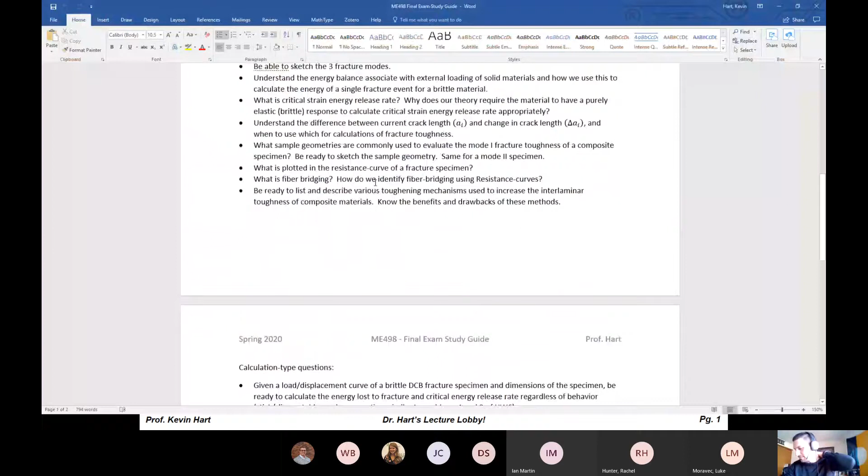So the first thing we did after the last test was talk about cure kinetics and rheological models. So let's get on with that. Know the definition of cure kinetics. All right, so kinetics is a pretty well understood branch of chemistry. It's a study of rate of reaction. If you want to throw cure in there, then maybe we come up with a little more formal definition.

Something like... I don't know, I'll just come up with it off the top of my head: the study of rates of reaction for thermosetting materials. That seems like a pretty good definition. You have to include somehow that the chemical reaction is including a cure step, right? That's what we mean by cure kinetics, the study of the rate of reaction of something that is going through a cure.

All right, so pretty straightforward. Just understand and know what people mean if you walk by someone and they're talking about cure kinetics or say that word, you understand. All right.

Now, for epoxy chemistries, what do the cure kinetics depend on? Which effects are most important? Well, they depend on many things. Obviously time, temperature, pressure — the things that we kind of control in the manufacturing process. Those are the three big ones: time, temperature, and pressure. It also might depend on if there are other chemical species present.

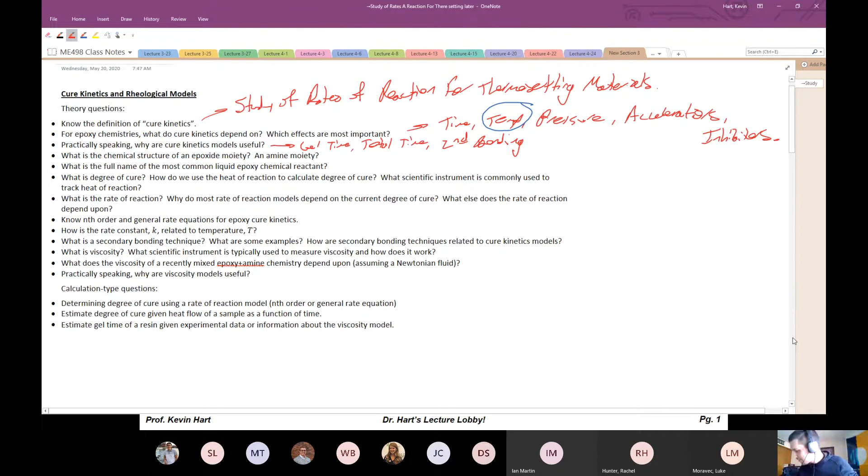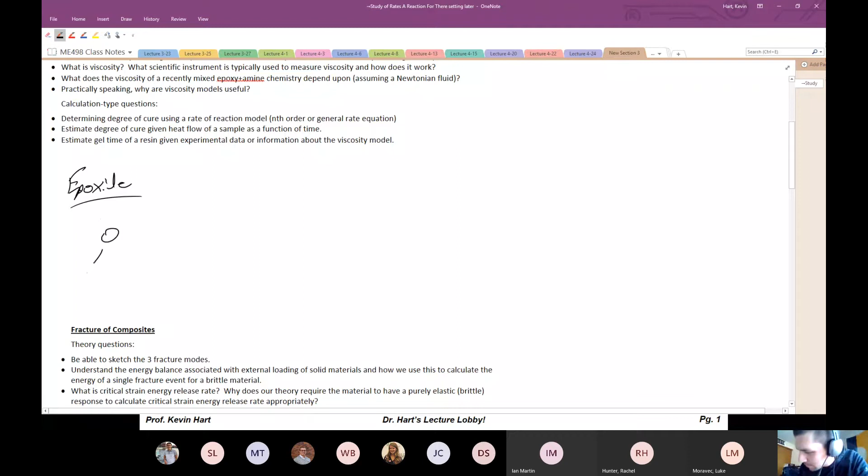What is the chemical structure of an epoxide moiety and an amine moiety? Remember, a moiety is a chemical species which is going to participate in the reaction. So epoxide moiety, that's OCC, or sometimes just drawn as that.

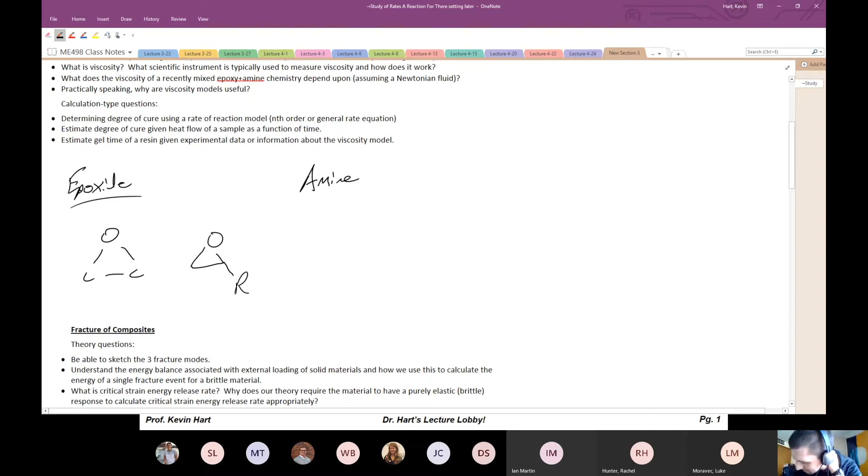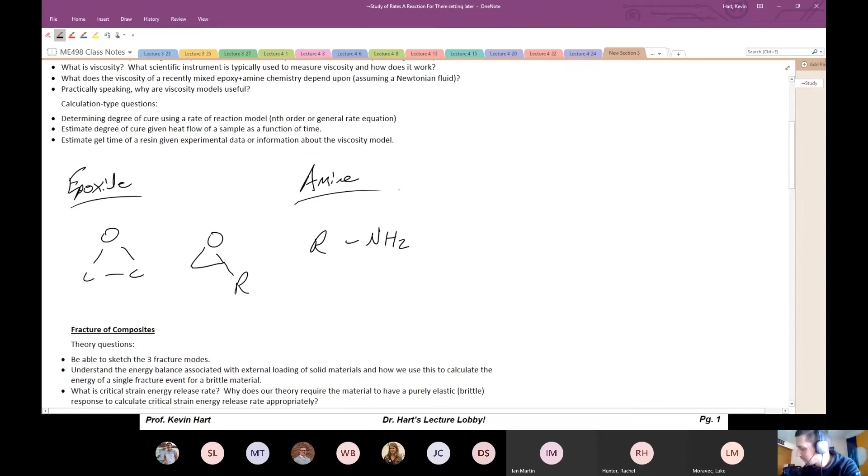So that's the epoxide moiety, and then the amine, usually connected to some random R group. Your amine moiety is the NH2, connected to some other portion of the molecule. This is reacting with this, and the way that this works is one of the hydrogens from the amine will pop off and spring open the epoxide ring, and there you go. That's how that kind of works. So there's your epoxide and your amine moieties.

What is the full name of the chemical epoxy chemical reactant? That's DGEBA, right? So DGEBA for short. D-G-E-B-A is the most common, and this is diglycidyl ether of bisphenol A. Not to be confused with diglycidyl ether of bisphenol F, which is also a very common chemical reactant. Know your DGEBAs.

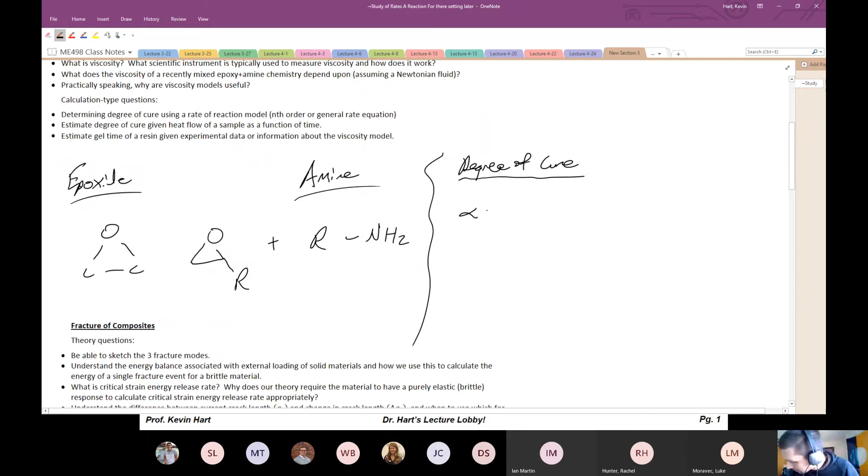What is degree of cure? How do we use heat of reaction to calculate degree of cure, and what scientific instrument is commonly used to track heat of reaction? So degree of cure is probably best to explain mathematically. We typically denote degree of cure with the variable alpha, and it's a ratio of how much heat has been released by my reaction divided by the total heat the reaction could release.

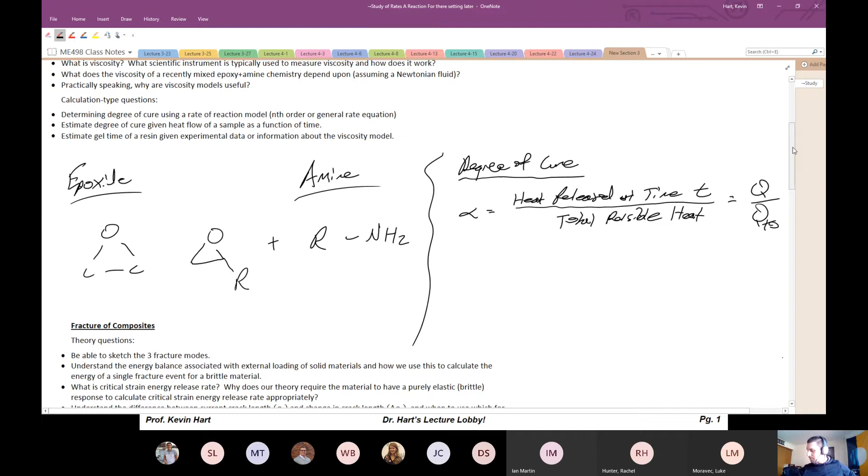Sometimes this is written as Q over Q total. So there's your degree of cure. It ranges from value 0 to 1. 0 meaning I have not reacted at all, and 1 is I'm completely fully reacted, all of the heat has been released from this particular reaction. So that is degree of cure.

How do we use heat of reaction to calculate degree of cure? Well, that's the heat of reaction divided by the total heat of reaction to calculate degree of cure. And what scientific instrument is commonly used to track heat of reaction? Well, that's a calorimeter. The most common in industry for evaluating this is called the differential scanning calorimeter, or DSC for short. But generally, if you want to track the heat of a reaction, you're looking for a calorimeter - that's the general name.

What is the rate of reaction? This is different. So let's talk about rate of reaction. Rate of reaction is d alpha dt. This is rate of reaction. It's how fast or slowly the degree of cure is changing. So it's the derivative with respect to time of the degree of cure evolving over time.

Why do most rate reaction models depend on the degree of cure? Usually d alpha dt is some function of alpha. So why does the rate of the reaction depend on the current degree of cure of the reaction? Well, we talked about this - as epoxies cure, there are less and less moieties available for reaction.

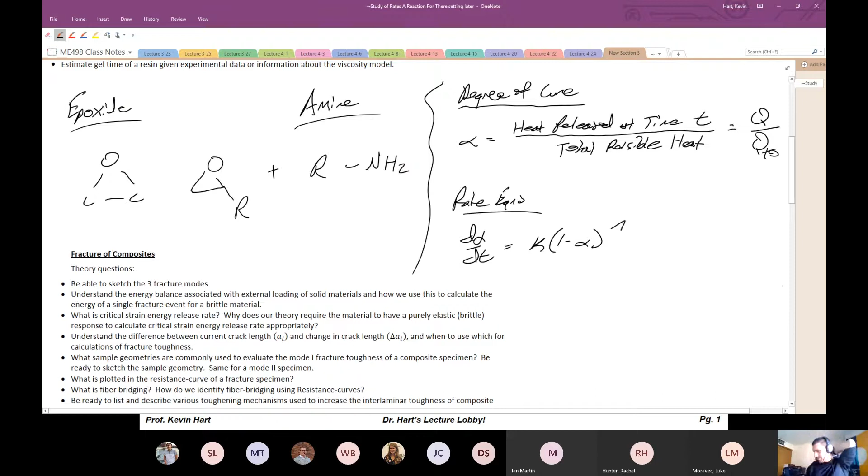No, nth order and general rate equation for epoxy cure kinetics. Remember our rate equations: we had something like d alpha dt equals k1 times (1 minus alpha) to the n. That's your nth order rate equation. The general rate equation is a little more complicated than that. I don't know if I'll have the space to put it in here. This is k1 times alpha minus 1... I can't quite remember it off the top of my head, it's in the notes. I want to make sure I don't mess it up.

I'm old, okay? Leave me alone.

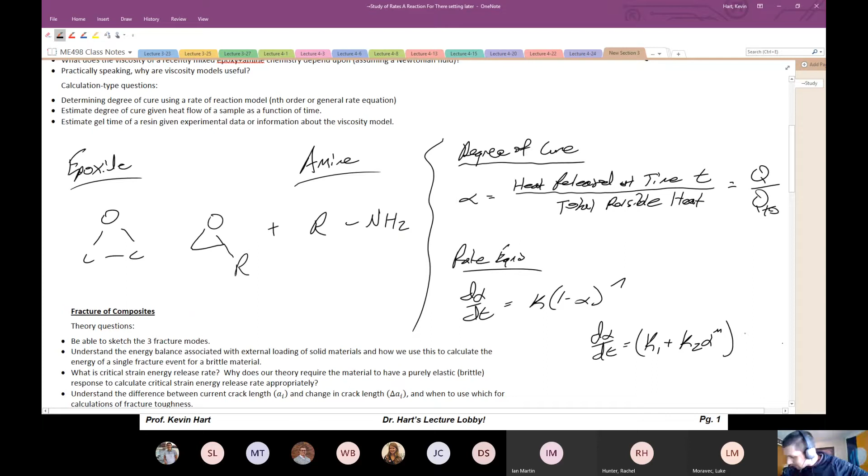K1 plus K2 alpha to the M, multiplied by 1 minus alpha to the N. There's your general nth order rate equation. This is nth order, this is general.

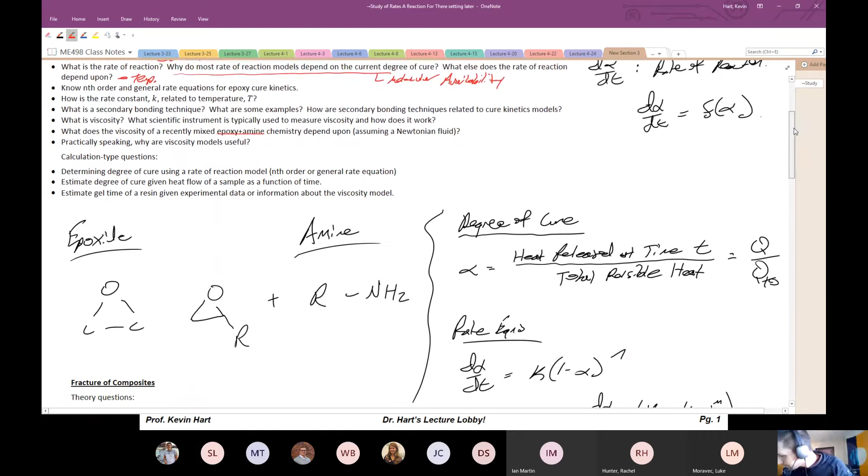What is a secondary bonding technique? What are some examples, and how are secondary bonding techniques related to cure kinetics models? Secondary bonding techniques we talked about include co-curing, generally secondary bonding, co-curing. What are the other technical terms? Co-bonding, bonding, co-bonding, etc.

The idea here is that if you have laminate number 1, which is cured at alpha equals 0.9, and you have another laminate that you're going to bond to it, also at alpha equals 0.9, and you bond these two, then you get increased reaction at this bonding site. That's because there's a chemical reaction that occurs across that interface rather than just an adhesive reaction. So there are cohesive reactions as well, meaning that the molecular structures of the two different species are interacting with each other.

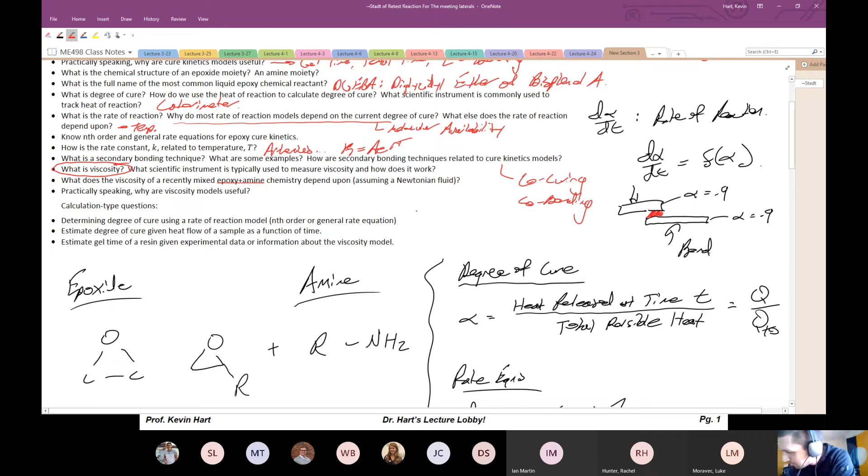Let's continue. What is viscosity? Technically speaking, viscosity is the ratio of the shear stress to the shear strain rate. I'm running out of space here, I need more space. So technically speaking, viscosity is the shear stress that you put on the piece, tau, divided by the strain rate, gamma dot. This is your viscosity generally. Physically, it's how much the material flows given an applied shear stress.

What scientific instrument is typically used to measure viscosity, and how does it work? That's a rheometer. We talked about rheometers a little bit here, let me bring the picture in really quick. Basically, you put a spindle inside of the liquid, and the spindles come in a variety of different types, many different types. The amount of torque it takes to spin the spindle inside that liquid, the amount of force, the kind of moment required to spin that spindle, gives you an indication of how viscous the material is.

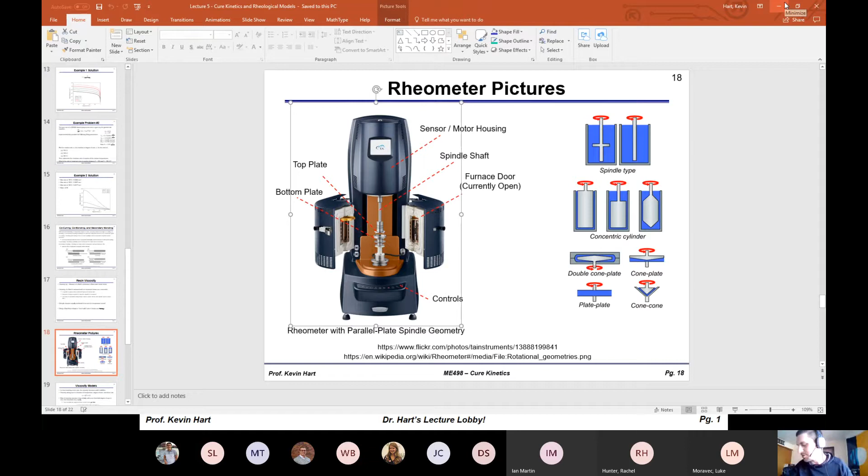The more viscous it is, the harder it is to spin that thing at a certain strain rate. So you measure the torque, and you know how fast you're spinning, so you have shear stress and shear strain rate, and the ratio is the viscosity. That's how a rheometer works, and this is one in action. You see the doors here that are open, they close shut, and inside there's an oven chamber that the spindle goes into, if you want to change the temperature inside and see how the viscosity changes, those sorts of things.

Next, what does the viscosity of a recently mixed chemistry depend upon, assuming a Newtonian fluid? Again, temperature is the biggest factor. Temperature, temperature, temperature. Sunday, Sunday, Sunday.

Practically speaking, why are viscosity models useful? A viscosity model is useful because, again, it can give you the gel time.

All right, so again, it's like this working time. It tells you when the viscosity is going to shoot up to infinity, and you're no longer able to process the material. That's probably the biggest one.

Also, it can sometimes be useful for sizing pumps. If you need to know how strong your pump needs to be to pump your liquid into your RTM process, you need to know the viscosity of the fluid, because the more viscous it is, the more back pressure you're going to get from trying to pump the fluid through some sort of pipe or something.

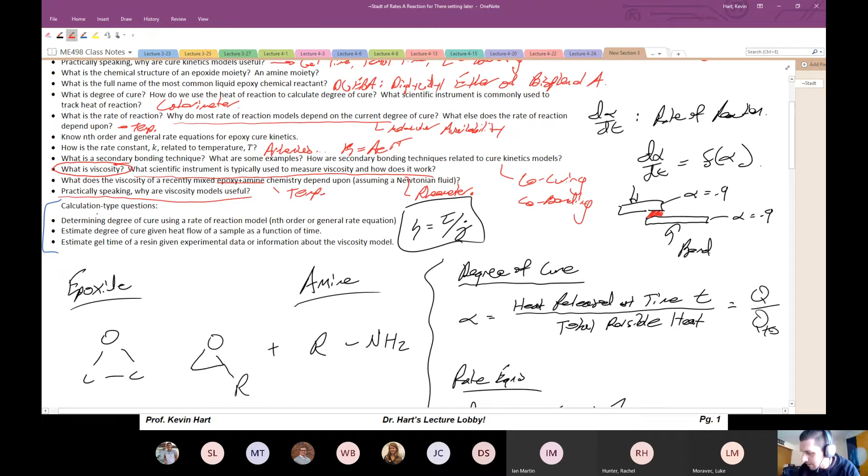All right, so that was a lot there. Now, calculation type questions I might ask you: determine degree of cure using a rate of reaction model. We did an example of this type of calculation in class, and you also had one on your homework, where you determine degree of cure using a rate of reaction model.

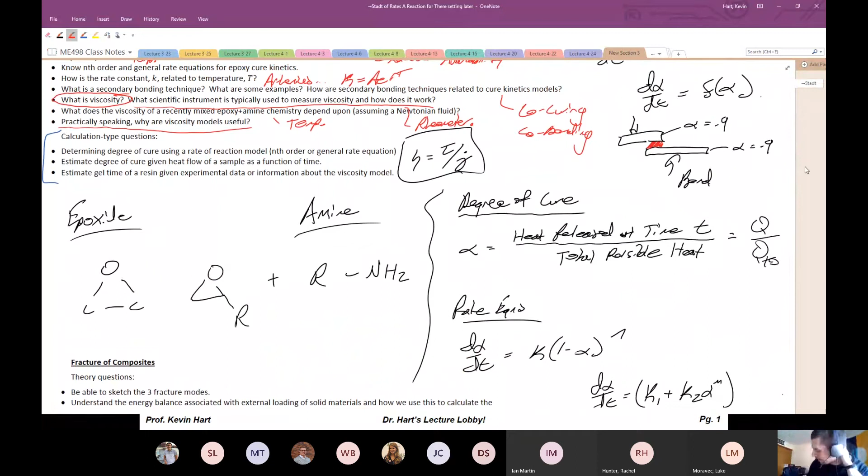So I might give you something like the nth order reaction model, which looks something like this, and ask you to integrate that and solve for time and determine what is the degree of cure as a function of time. That's something I asked you to do on your homework, so that's not an unreasonable thing to do in a short amount of time.

All right, estimate the degree of cure given heat flow of a sample as a function of time. This one's a little bit more subtle. Remember what heat flow as a function of time looks like: here's time, here's heat flow, usually given as W(T) in watts, usually watts or watts per gram, and this comes from a calorimeter.

And what this looks like is you're heating up, heating up, heating up, and then over time the heat of reaction kind of tapers off, something like that. And so this is the total heat of reaction.

Total heat. And if I'm interested in what is the current degree of cure of this piece at any time t, well, at this particular time, let's call it T1, I would move my way up here and say that this is the heat associated with time T1. So this is Q at T1. And then my degree of cure, alpha, would be whatever Q is at time 1 divided by the total heat.

So if I gave you a graph that looked like this, you'd have to figure out: what is the area under the curve for the total situation? What is the area at some specific point, so on and so forth? So you should be able to calculate degree of cure given some sort of general chart that looks like this.

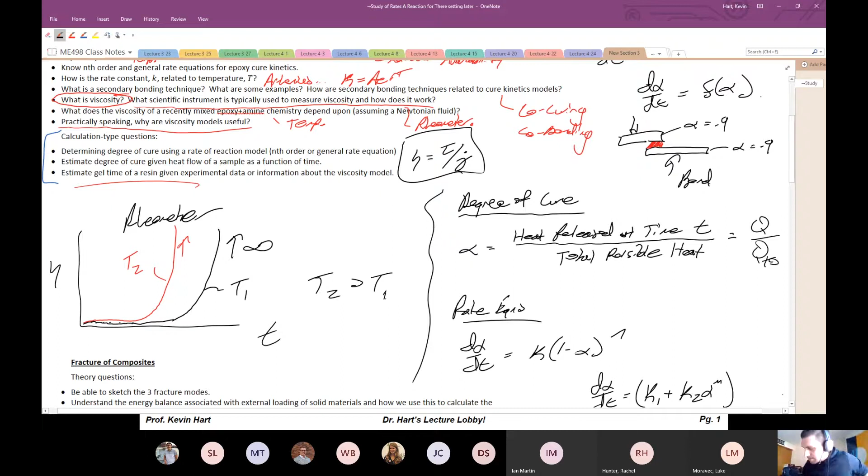And beyond, right? And you might have another data set that's at a different temperature that shoots up to infinity here. This might be T2, and this might be T1, and obviously T2 greater than T1, because we know that viscosity depends on temperature, and it's going to shoot up to infinity very, very quickly at higher temperatures of cure.

So there you go with some rheometer type data. So if I give you that sort of thing, you might want to estimate the gel time as, I don't know, the time that it approximately goes to infinity. So here's T gel for temperature number 1. Where does it shoot up to infinity? Give me some approximation. All right, so that's that.

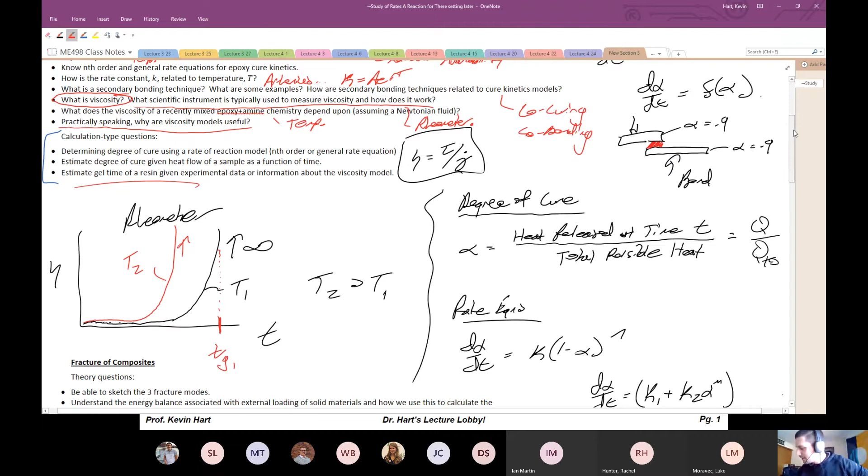Next, we went on to fracture. Fracture was, in this portion of the course, probably the most mathematically intense part that we had, though I think fracture is important for composites because it's one of the dominating modes of failure. So it's important for you guys to know fracture - that's why I spent 4 or 5 lectures on it.

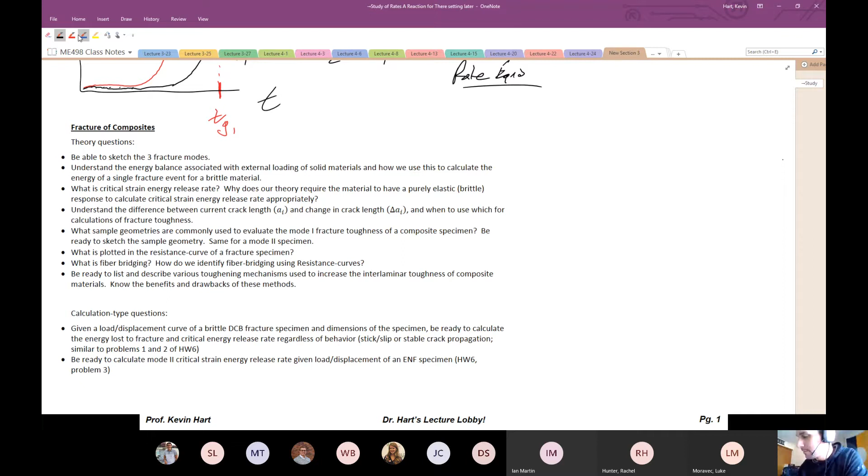All right, able to sketch the 3 fracture modes. Yes, all right, let's do that. Mode 1: here we got our awesome sample, here's the crack. Mode 1, here.

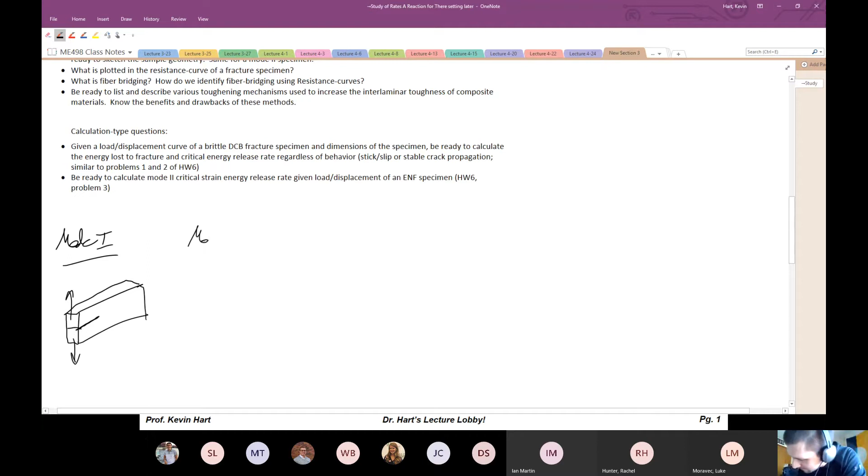Mode 2: here we got our crack again, would be loading in this general direction. And then mode 3.

I expect this level of terrible sketching on your test, okay? Mode 3 is we're loading across the plane, this way, this way.

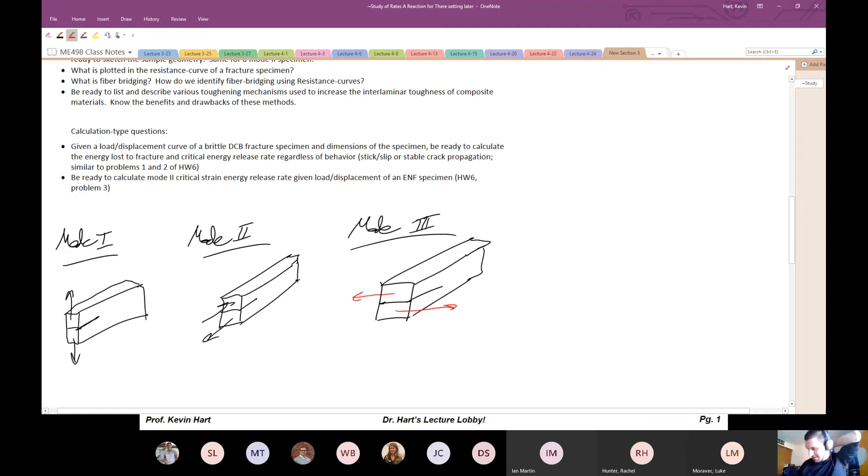All right, the trouser tear. Not the trouser terror, the trouser tear. All right, those are the 3 modes.

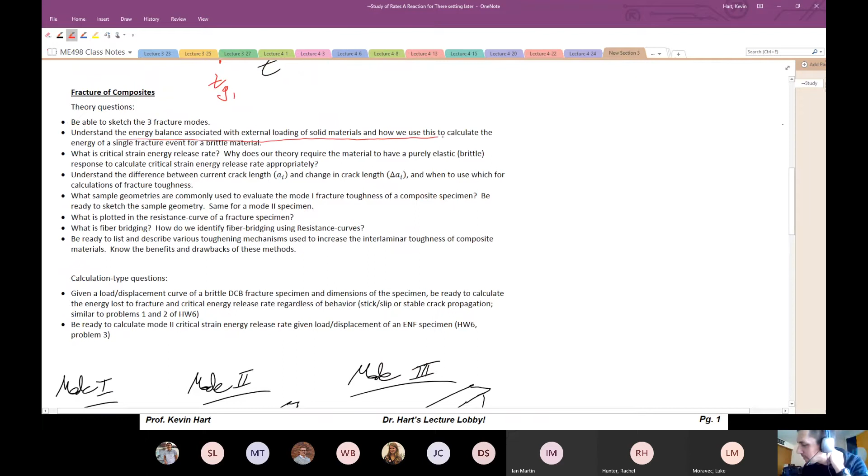Understand the energy balance associated with external loading of solid materials and how we use this to calculate the energy of a single fracture.

So we know generally when we load a solid material, let's say you have some bar. Guy walks into a bar.

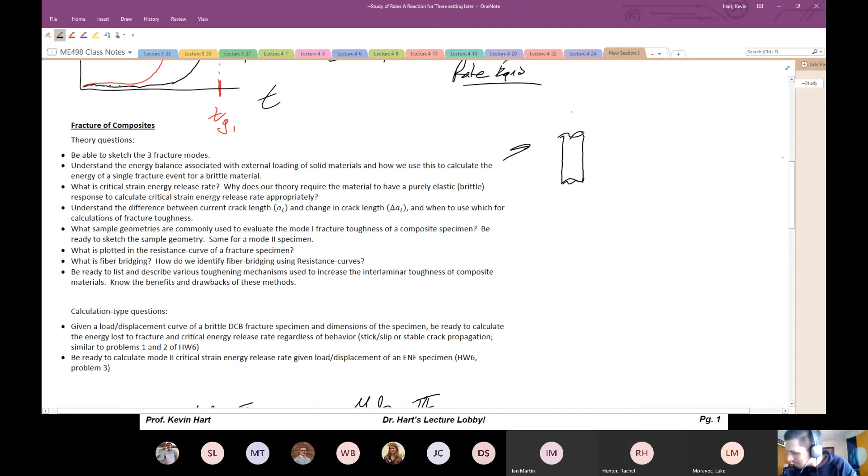So let's say we have some bar and we're loading this up, just in uniaxial tension. There is a work associated with us providing this external force. The work of external forces is going to be something like the integral of this load over the displacement. So there's some total work that gets applied to this piece.

The total work that we apply externally has to be balanced by the energy that's inside of the piece. It could be balanced by elastic strain energy, could be balanced by plastic strain, could be balanced by motion, so kinetic energy, and it could be balanced by fracture.

I'll also say other. Other might include things like heat, sound, those sorts of things. If I load very quickly, it's going to make a noise. That noise is release of energy.

Now, what we talked about in our class is we generally said that materials were brittle. So we're kind of neglecting this guy here, saying that we're brittle, so we don't have any plasticity in our samples. That's an assumption that we made. If you make a thermoplastic composite, that's not a good assumption.

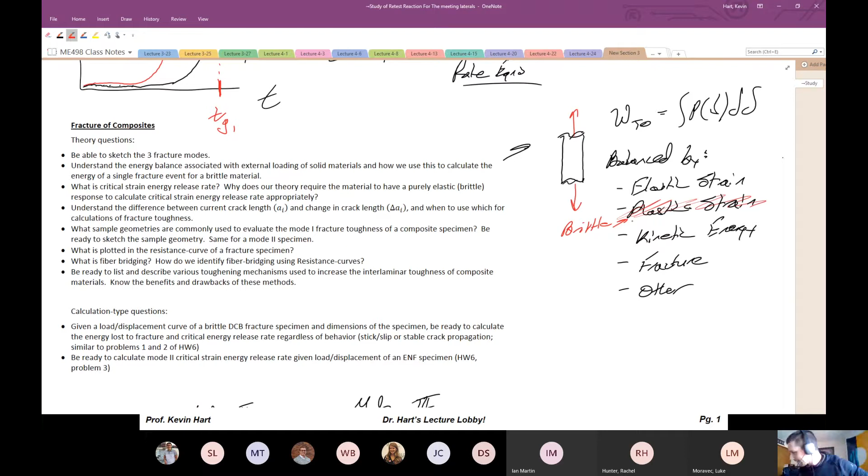We're also assuming it doesn't move, so no motion. Other, we're neglecting. So really, the total work that we put into the system was going to be balanced by elastic strain and by fracture.

So mathematically, we wrote that the total work that goes into a piece is the elastic strain energy UE plus the energy associated with fracture, which we labeled as capital D. This was the general model and where we built everything for composites in our particular class. This was the basis for all of the modeling that we did for our system.

So kind of just understand this generally, and why we have to assume something like a brittle material so that we can neglect plastic strain, and why we have to assume that we're loading it slowly so that there's no kinetic energy, etc.

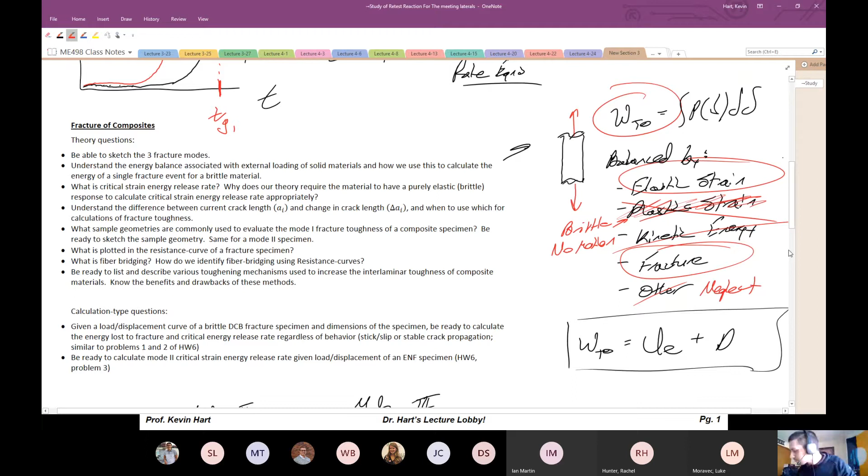How we use this to calculate the energy of a single fracture event for a brittle material. This again goes back to what it looks like when we load one of these things up. So here's my displacement delta, here's my load P, and let's say that I have a sample that looks something like this, and I'm pulling on it here, and it's got a fracture there.

So what's going to happen if I put this in a load frame? It's going to load up, and then all of a sudden, at some point, there's going to be some fracture event, bang, that occurs. And that fracture is going to release the energy, and then we can unload back to the beginning. So this is load, and this is unload. And here, this is the fracture.

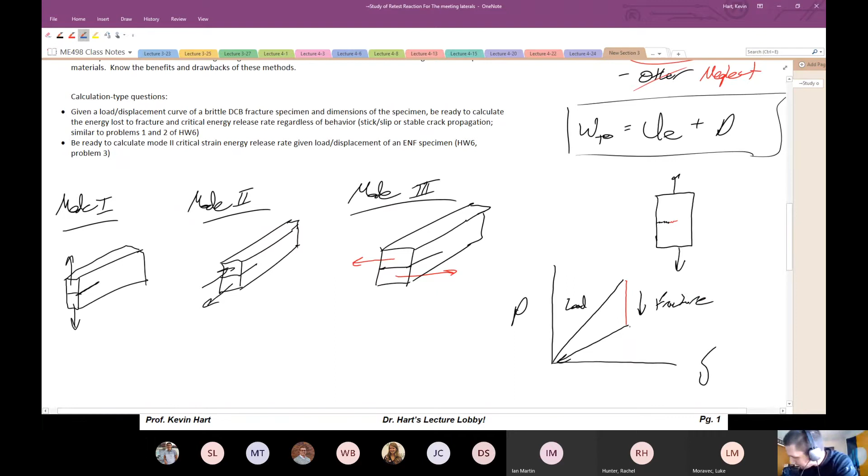So the energy that we recover is the energy inside of this triangle here. This is recovered energy, which is the energy under the curve here. So this is elastic energy, UE. And then the energy that went into the fracture is the remaining energy that exists inside of this load displacement curve. So here, this is the energy of fracture, capital D.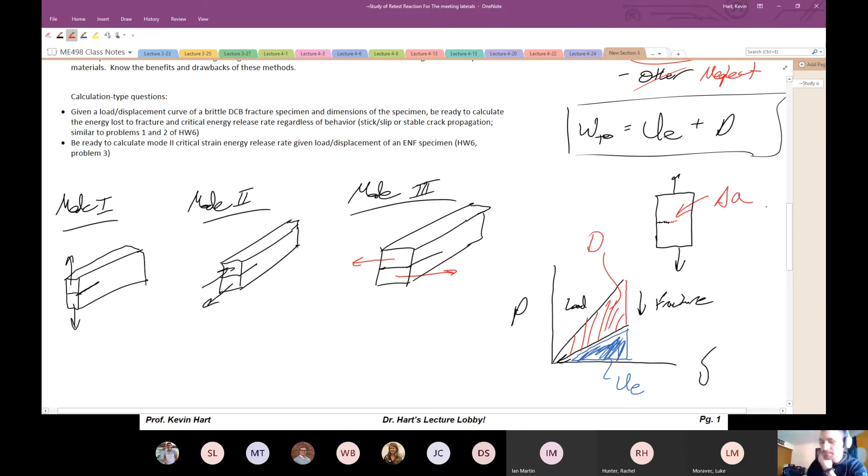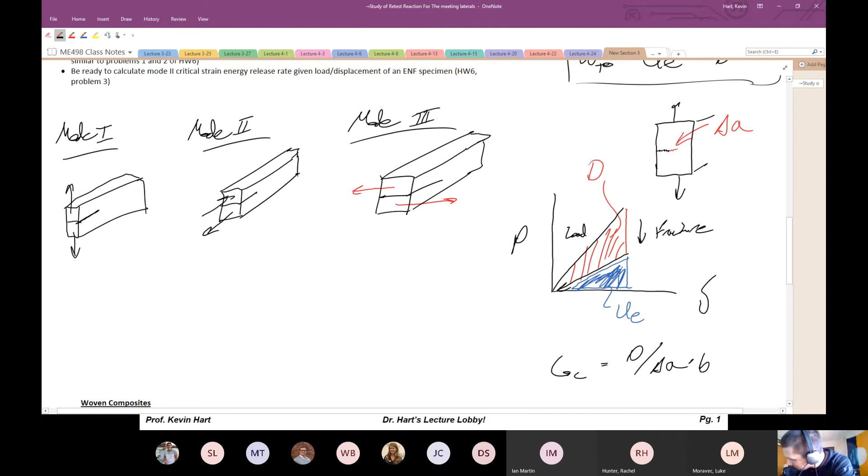So if the crack advance, this delta A, has the energy associated with it, which is this capital D, then we say that the critical strain energy release rate, GC, is just equal to fracture energy D divided by the crack advance length delta A times the width of the piece into the page, B. We assume that this has some width to it, which is little b.

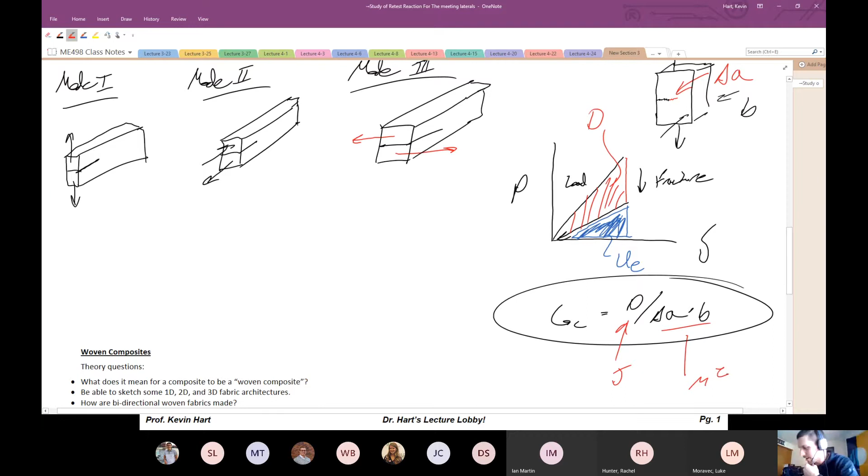So this is your critical strain energy release rate. It's in units of something like joules per meter squared. Energy required to open the crack a certain area, right? Energy per crack opening area, joules per meter squared. And that's your fracture of a brittle material.

So what is critical strain energy release rate? Well, I just talked about that. Why does our theory require the material to be purely elastic? Response to critical strain energy release rate appropriately. We talked about it being brittle because we know that it has to be just elastic strain and fracture that sort of balance this thing out. So we have to have brittle behavior so that we can eliminate plasticity. Brittle, no motion, eliminate plasticity, eliminate kinetic energy. So that's why our theory requires the material to have a purely elastic response.

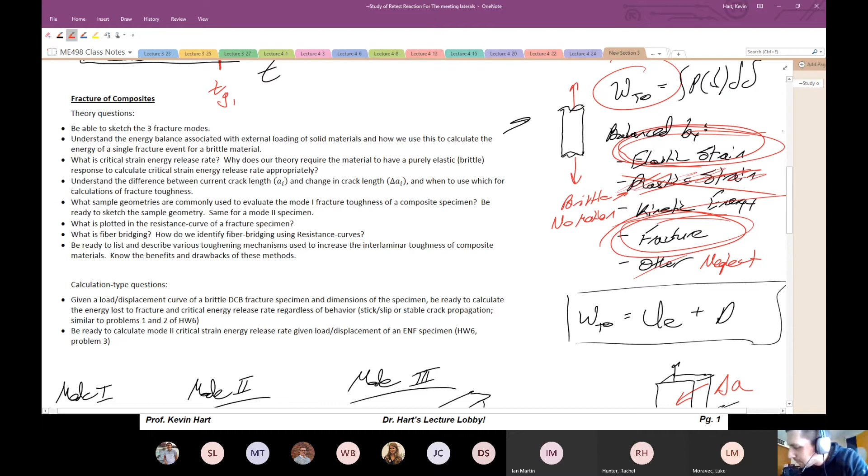Understand the difference between current crack length and change in crack length, and when to use which for calculation of fracture toughness.

This kind of threw you guys a little bit in the homework. A lot of people had this mistake differentiating between total crack length and crack advance.

Say you have some sort of fracture specimen. Let's call it a double cantilever beam specimen. Here's my initial crack length, and I'm loading this guy up here. This is a double cantilever beam composite specimen. It's got width into the page of B.

So I load this guy up, and I'll say that it has some initial crack length, which is a0, my initial crack length. When I load this thing up, let's say it behaves in a stick-slip fashion. So I load this guy, it fails a little bit, I load it more, it fails a little bit, I load it more, it fails a little bit. And then we unload.

So what that's going to look like is I'm going to have a failure event here that occurs, a failure event here that occurs, and a failure event here that occurs. So the crack is going to propagate in each one of these situations. Maybe that's the propagation associated with event number 1. There's some propagation associated with event number 2, and there's some propagation associated with event number 3.

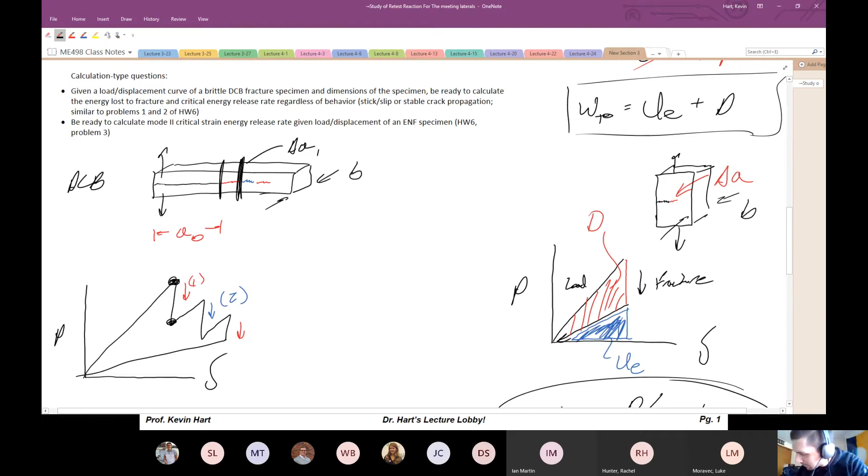That's different than the crack propagation associated with event 2. That might be from here to here. So this distance is delta A2, the distance that the crack propagated for event number 2, associated with that point and that point, the amount that the crack opened between those two particular points, and so forth.

That is different than the total crack length, which, at this particular location, the total crack length would be this guy here. This is A2, where this is sort of the second propagation event. So what is the crack length at this location?

Know the difference between total crack length and crack propagation between two different points. They're different values.

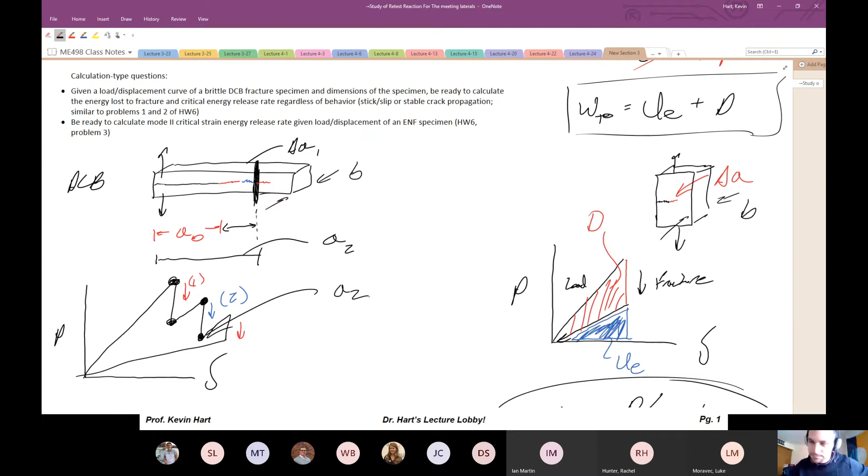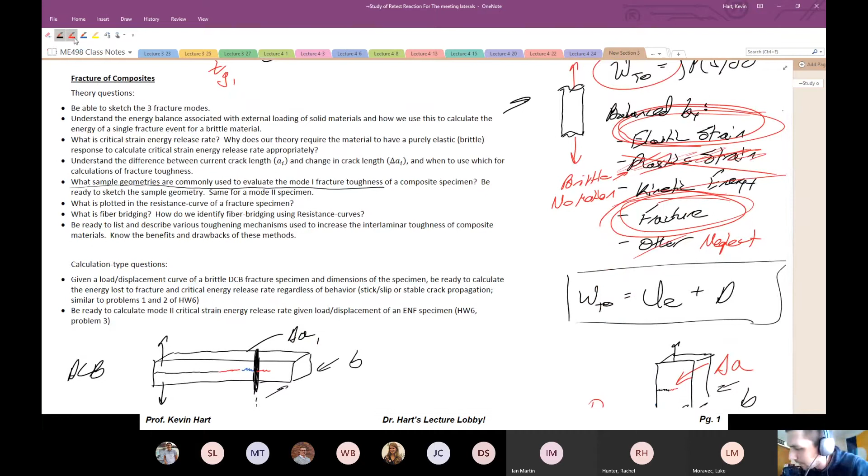What sample geometries are commonly used to evaluate mode 1 fracture toughness? Well, double cantilever beam for mode 1.

So if you're looking at it from the side, it looks like this. You have some starter crack, and you're going to load it here and here, maybe by putting piano hinges on there, or drilling some holes inside of the sample. So this is mode 1, the double cantilever beam, and then mode 2 is the end notch flexure.

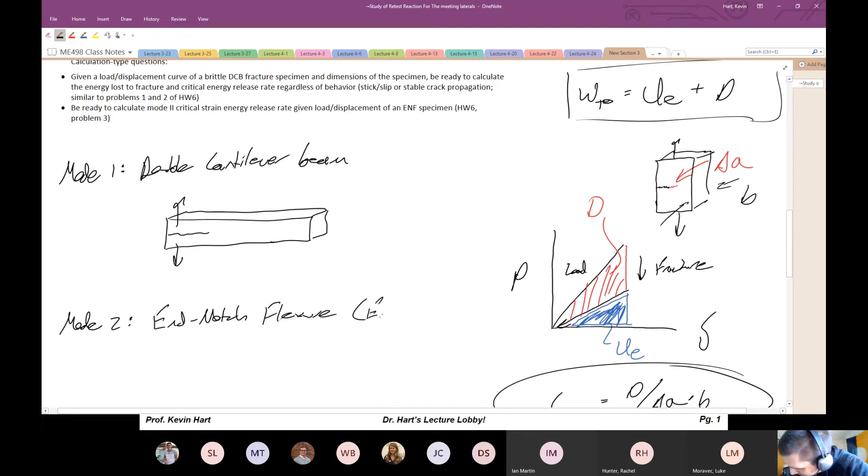Abbreviated as ENF. The end notch flexure looks very similar to a double cantilever beam, except in the way that it's loaded. Here again we have some pre-crack inside the sample, and now we're going to load this guy, typically in 3 or 4 point bend. So P on 2, P on 2, and P. That's going to cause this crack to propagate in that general fashion. So that's end notch flexure.

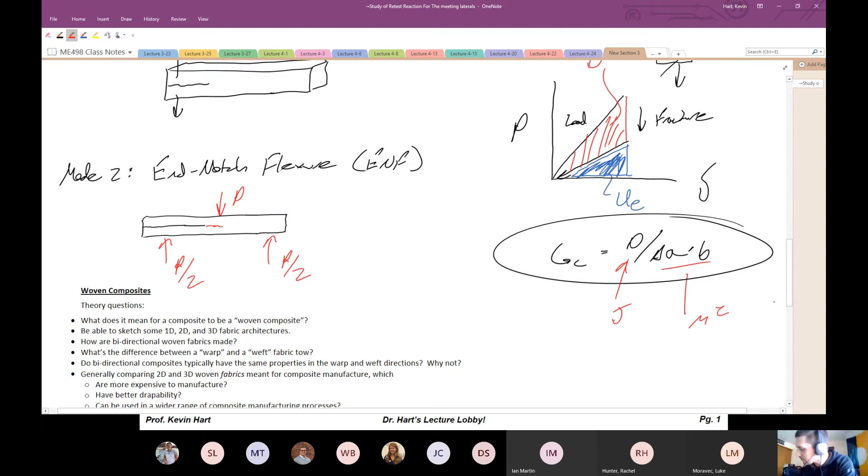What is plotted in the resistance curve of a fracture specimen? Well, the resistance curve of a fracture specimen plots GC versus crack length delta A.

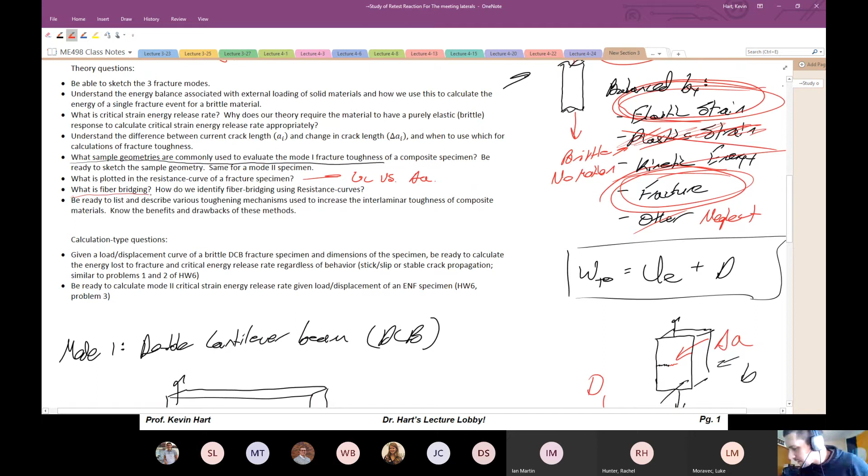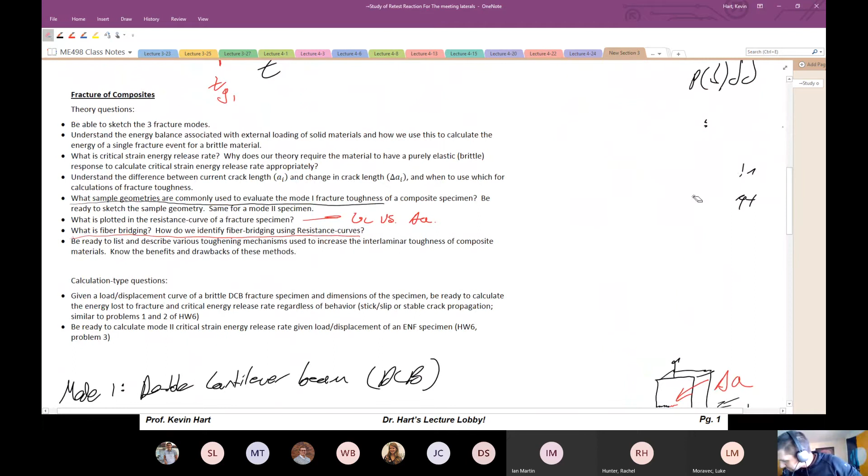What is fiber bridging, and how do I identify fiber bridging in resistance curves? Need some more space. Might be better just to show the picture of this guy. Picture's always better. It's tough for me to draw fiber bridging. Not so easy to draw.

All right, whatever. OneNote's being dumb? Well, it's probably user error, but you get the idea.

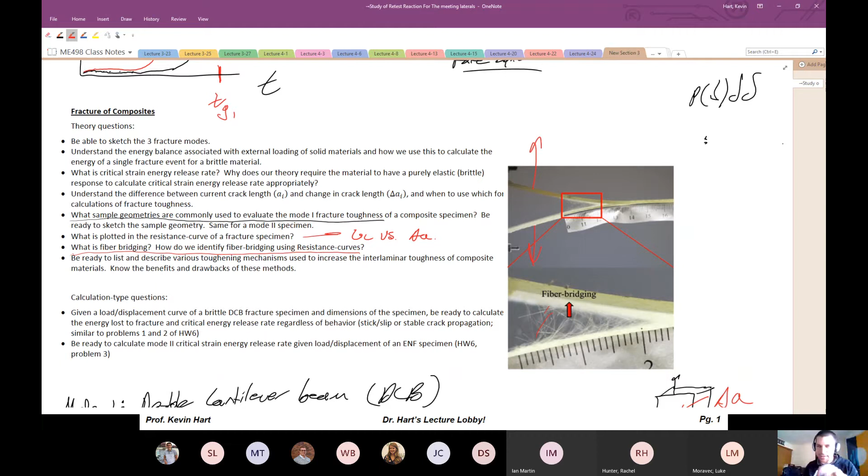All right, here's fiber bridging. You're pulling this guy open, pulling this guy open, and there's all these hairs occurring inside of the crack plane, and those hairs act to toughen the interface between the individual layers. Now, when you first start the testing, those hairs are not there because there's a piece of Kapton or Teflon inserted between the layers that stopped that fiber bridging originally.

So what happens when you're looking at the response of a test is if you're looking at the R curve for a DCB, it might look something like this. On the x-axis is your change in crack length, the crack length delta a, and this is your Gc value. Initially the values are low, but then at some point it plateaus off.

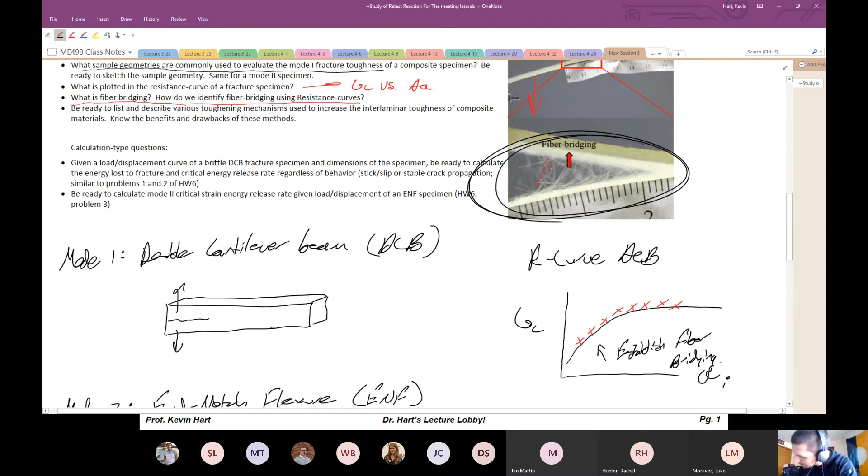So what's happening here is that we're establishing fiber bridging, something that looks like this. And then once I've reached this plateau here...

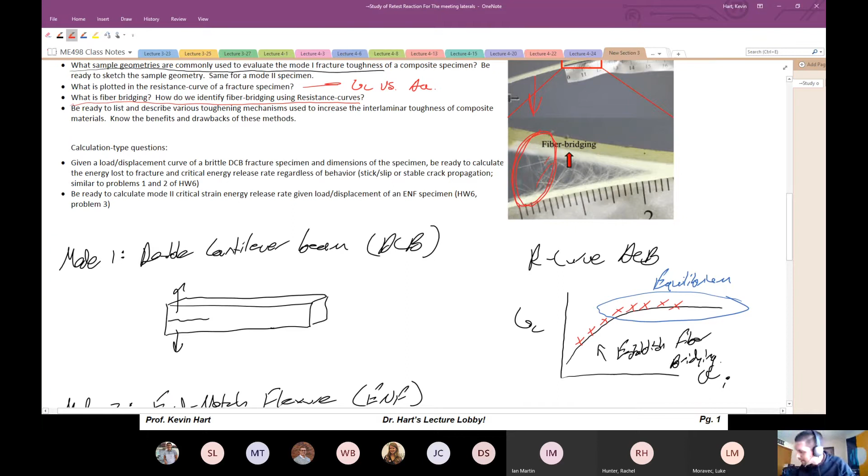I've got an equilibrium between the amount of fibers being created as the crack propagates and the amount that are being ruptured on the back end. There are guys on the left hand side being ruptured as the crack propagates, and we're forming new bridges on the front end. So once there is an equilibrium between how many we're losing on the left and how many are reforming on the right, we're not going to reach a plateau until that occurs. But once it does, you see this equilibrium in the R curve.

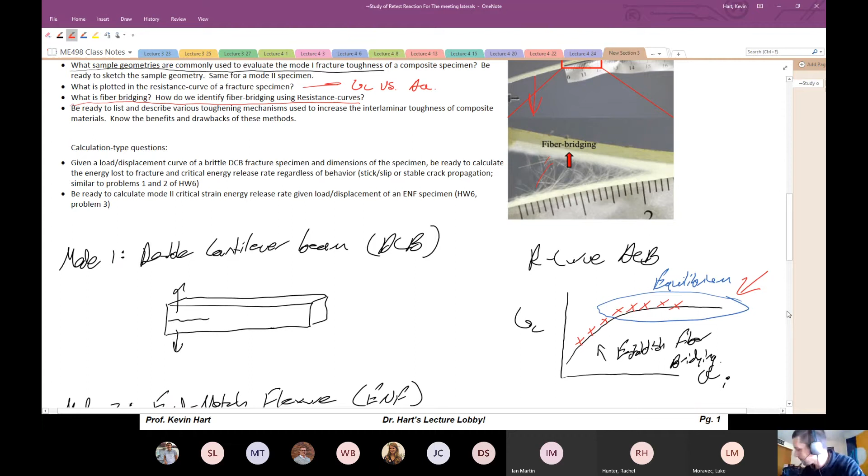That's how we identify fiber bridging, and that's what fiber bridging is — fibers across the interface which help toughen it.

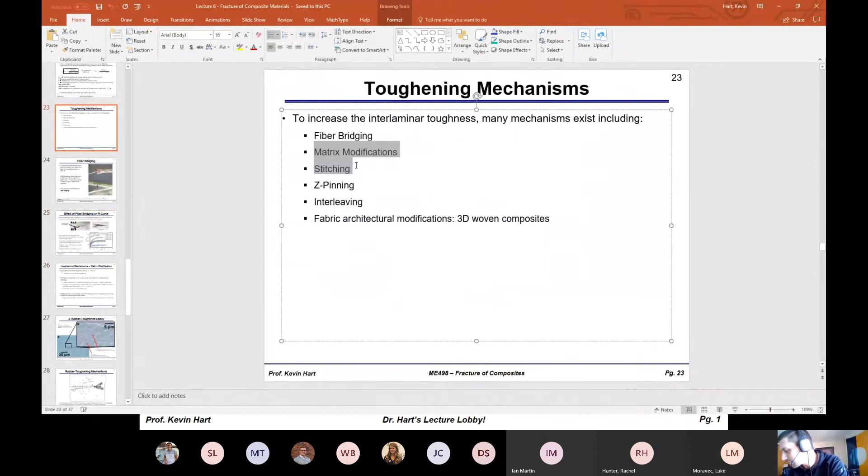Next, be ready to list and describe various toughening mechanisms used to increase interlaminar toughness. We talked a lot about these, and there's a lot of different types that we saw. The list is on slide 23 of your notes. Fiber bridging is one natural toughening mechanism, but we also talked about matrix modifications, stitching, Z-pinning, interleaving, and fabric architectural modifications.

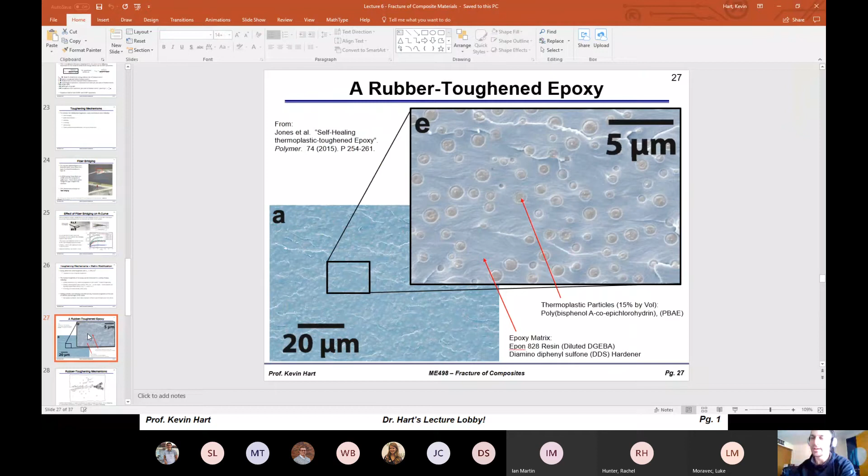All right, so here's a rubber toughened epoxy matrix. We talked about this picture a little bit. Rubber toughening can help increase the toughness of the matrix material through plasticity mechanisms that are good for rubber toughening.

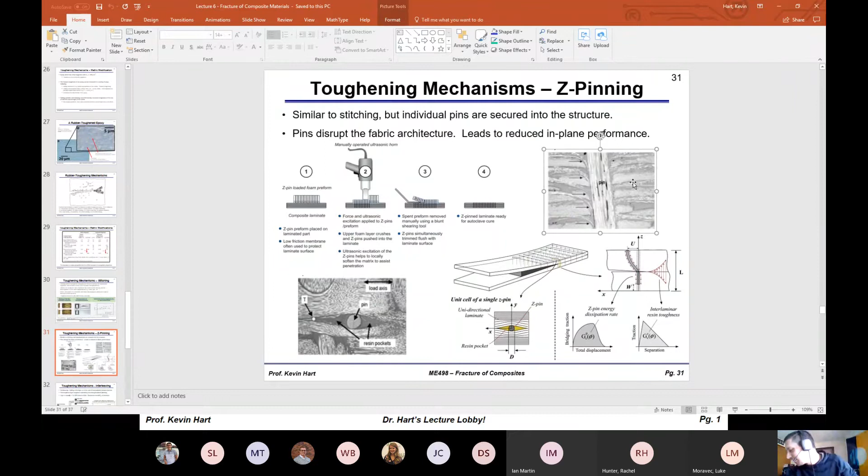We talked about stitching and Z-pinning. Here we had that gun that was driving the pins into the fabric. We see the pins forming inside of the fabric, but we know that these pins disrupt the fabric architecture that's in the plane, so it's not always the best method.

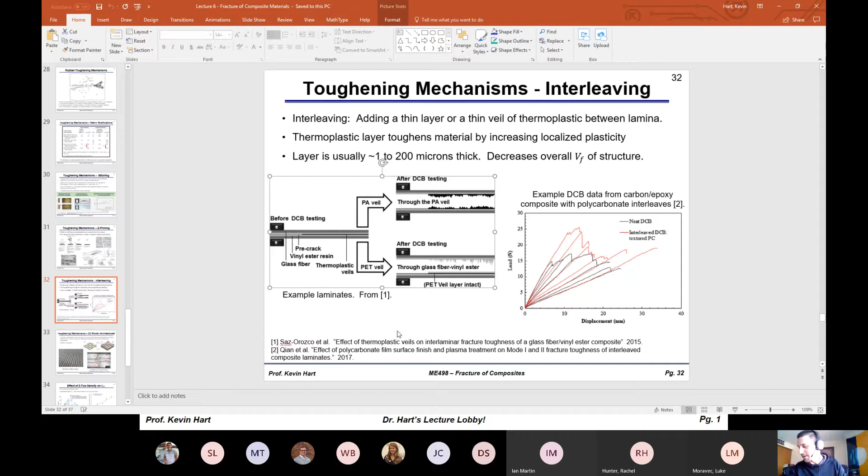Here we talked about interleaving. Interleaving is using a thermoplastic layer between fabric layers to increase toughness. If you add a very thin thermoplastic layer between the individual lamina layers, you can arrest crack growth through the plasticity involved in that thermoplastic interlayer. Here this is a PA veil — PA is polyamide, another name for nylon. Here is PET, polyethylene terephthalate, a different type of thermoplastic going between layers of a DCB, toughening the matrix.

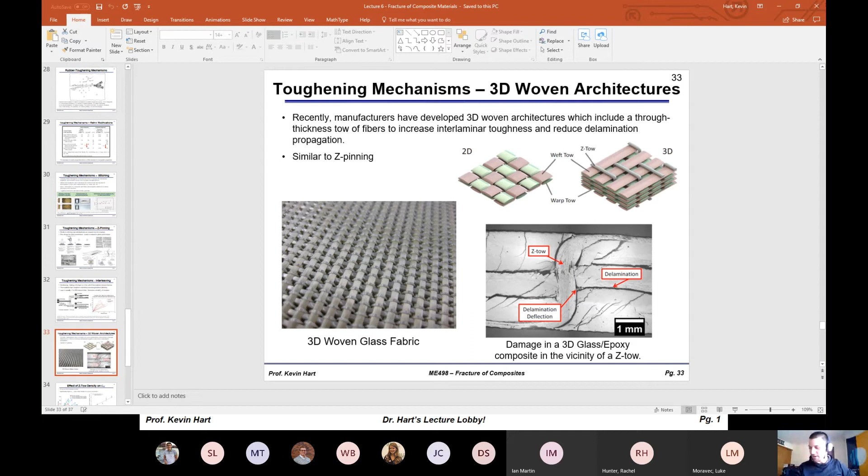We talked about 3D composites. The through-thickness tow really helps increase the interlaminar toughness of these 3D composites, with woven architectures giving this added benefit of increased fracture toughness. So those are some of the toughening mechanisms we saw in this class.

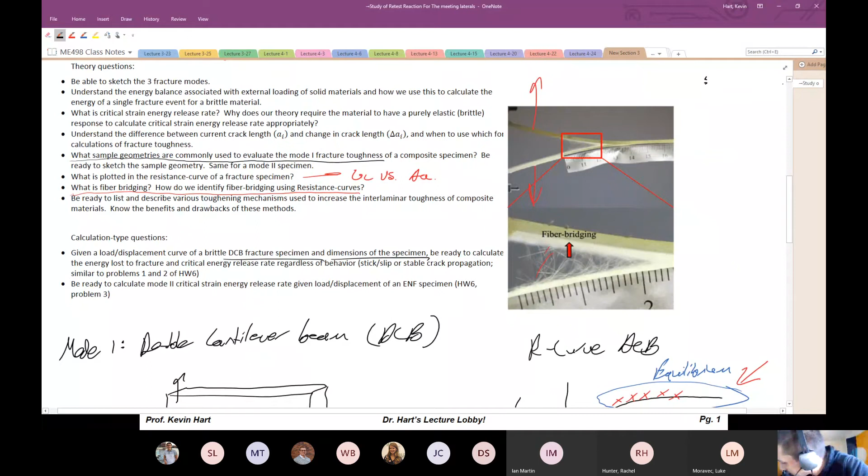Calculation type questions: given a load-displacement curve of a brittle DCB fracture specimen and dimensions of the specimen, be ready to calculate energy loss to fracture. I sketched that out before — the idea was if you have a load and displacement curve of some fracture specimen, let's call it a DCB specimen, with delta on one axis and load on the other, you load this up, there's a fracture event, and you unload.

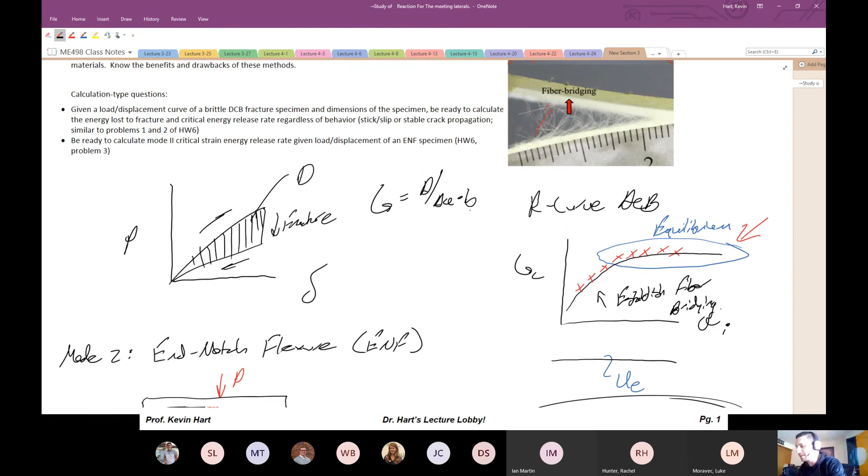You can be ready to calculate what is the area associated with a fracture. So here's D, and then if you have sample dimensions, G is just D divided by delta A, the crack advance, multiplied by the width of the sample B. That would be a sample calculation you might do on the test. It's areas under the curves, man — that's all it is in this class, I guess.

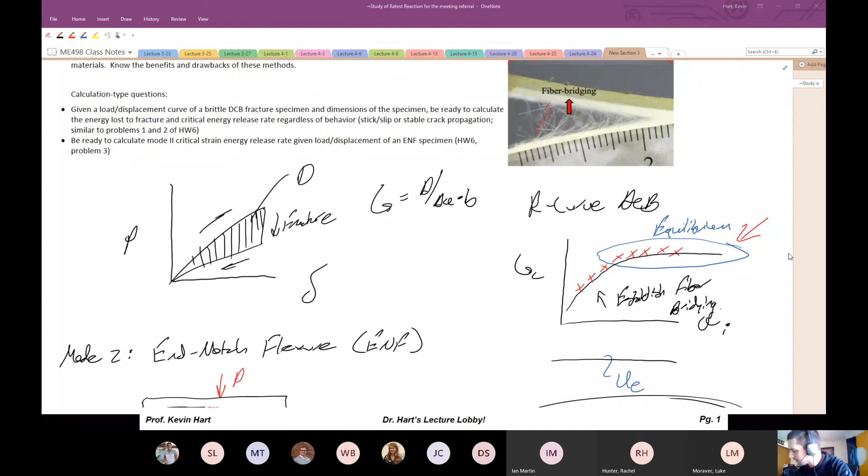Be ready to calculate mode 2 critical strain energy release rate given information about an ENF specimen. That's something you did in homework 6, problem 3. We had an end-notch flexure specimen, there was an equation associated with that, and you did that for problem number 3 in your homework. All right, so that's the fracture section.

Woven composites — we just got done working our way through this. You just did this on your homework, so I'll spend a little less time here. What does it mean for a composite to be a woven composite? Well, it has fabric that is interwoven.

With multi-directionality.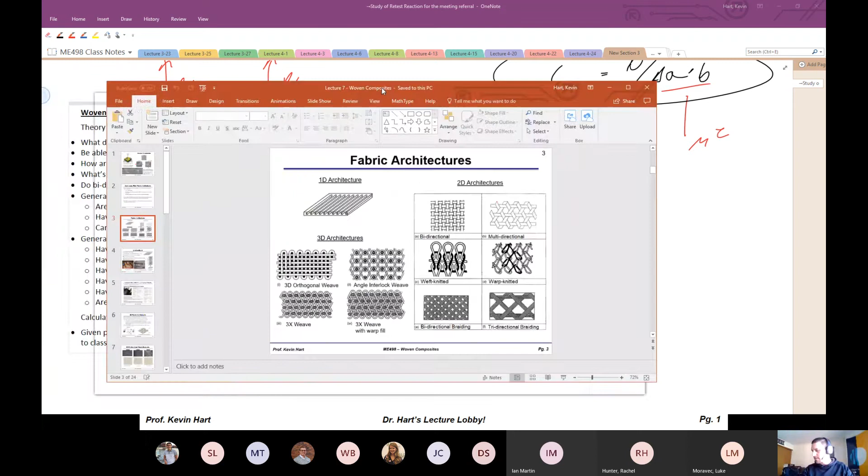Be able to sketch some 1D, 2D, 3D fabric architectures. We saw a lot of these different fabric architecture types. Hopefully you can sketch them at this point, but the general figure I had for the class looked something like this. 1D is obviously unidirectional. 2D architectures include bidirectional weaves, like plain weaves and satin weaves. You've got knitted fabrics on row number 2, and braided fabrics on row number 3. Then here are 3D architectures: orthogonal weave, angle interlock weave, etc. So those are some fabric architectures.

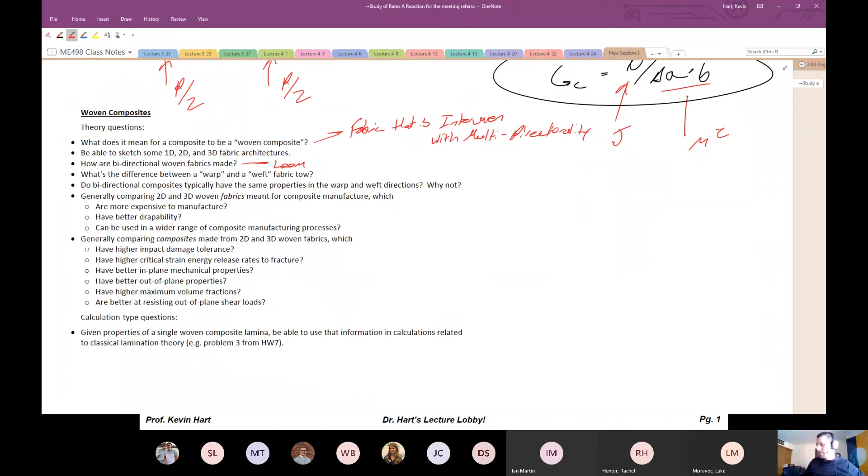How are bidirectional woven fabrics made? Well, they're made on a loom. Maybe just be able to sketch the process. You don't really need to know all the nomenclature, but basically you've got warp tows that are being separated, coming together on the back end to form the fabric. Then you're passing a weft tow in between the warp tows. Here, this gate is lifting up and down the warp tows as it goes through. This is called the shed, and the shed is arranging the patterns. I showed a video of this in class.

What's the difference between a warp and a weft fabric tow? Well, the warp tows are the tows aligned longitudinally, these continuous tows on the loom. The weft tows are being shot in between the openings inside of the loom as it goes through. So that's the difference between warp and weft.

Do bidirectional composites typically have the same properties in the warp and weft direction? Why not? Okay, they typically do not. When you did your homework, hopefully you found it was more difficult to find fabrics with the same properties in both warp and weft. That's because of how these are manufactured - it's really difficult to keep the warp and weft counts consistent. What I mean is you have a certain number of ends and a certain number of picks, which are the warp and weft counts per inch of the fabric. It's really difficult to keep those consistent from a manufacturing perspective. So it's difficult to have fabrics with the same properties in both the warp and weft directions. Why not? Manufacturing difficulty - it's difficult to keep that consistent.

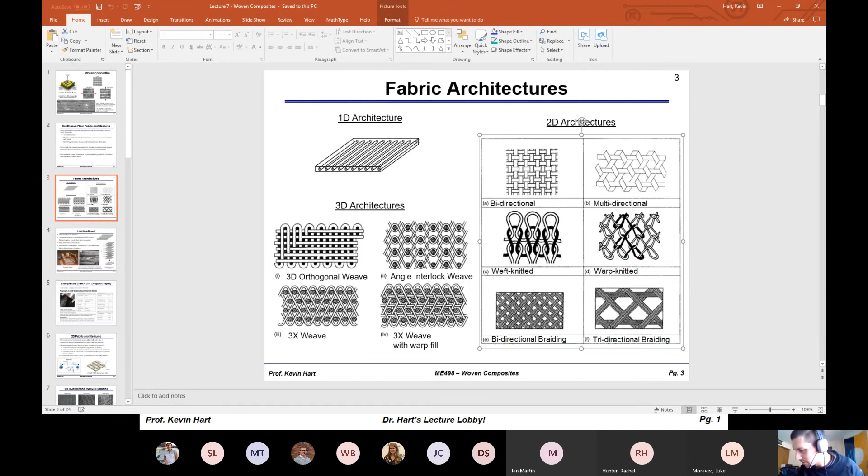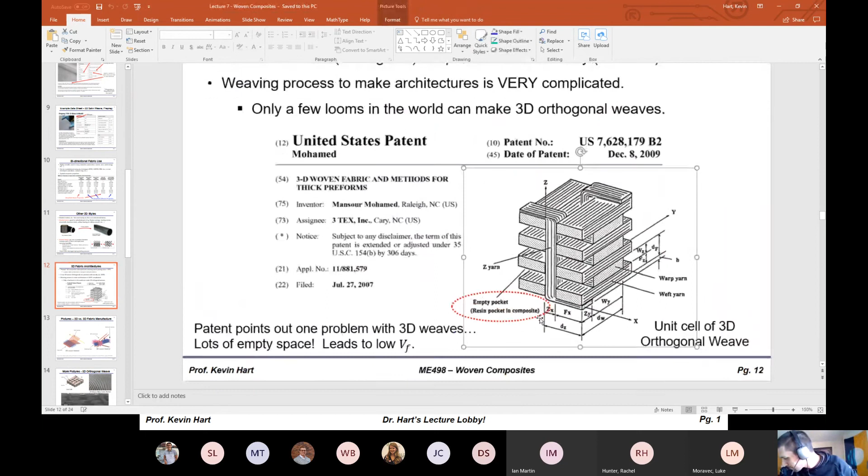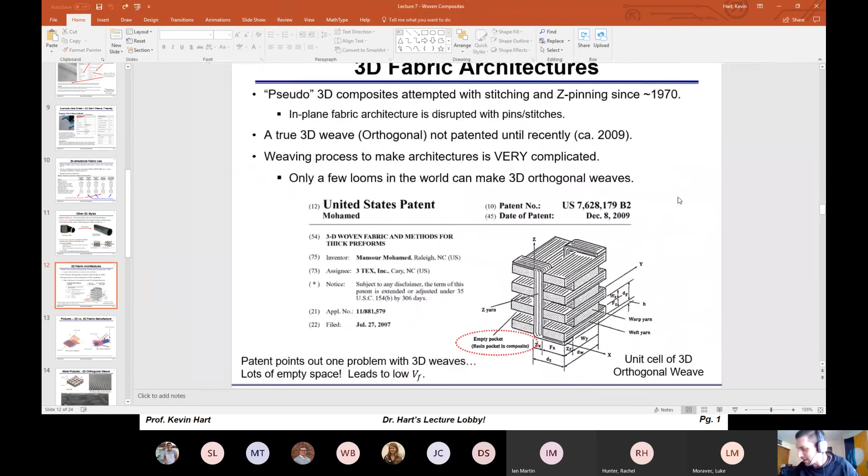Here's the patent for the 3D woven composite material, and they even say right down here: empty pocket, resin pocket in composite. So that is an interstitial region in the 3D weave of this particular material. That interstitial region gives you a place where epoxy is going to be where there's no fibers—a lot of interstitial space. You can see it in the unit cell too. There's just a lot of empty space in this unit cell for a 3D woven composite where the epoxy can fill that fibers won't be.

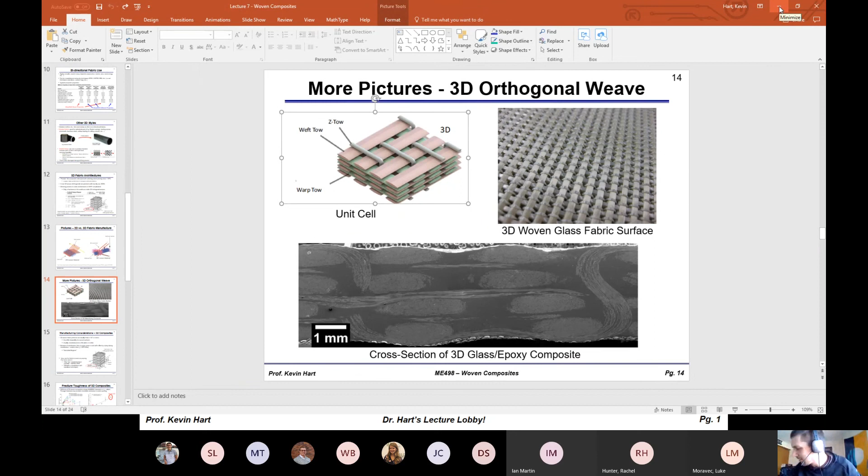They're better at resisting out-of-plane shear loads because they're 3D—they actually have some thickness to them, and they have this tow that sort of holds them from being sheared in this general direction if it's thin.

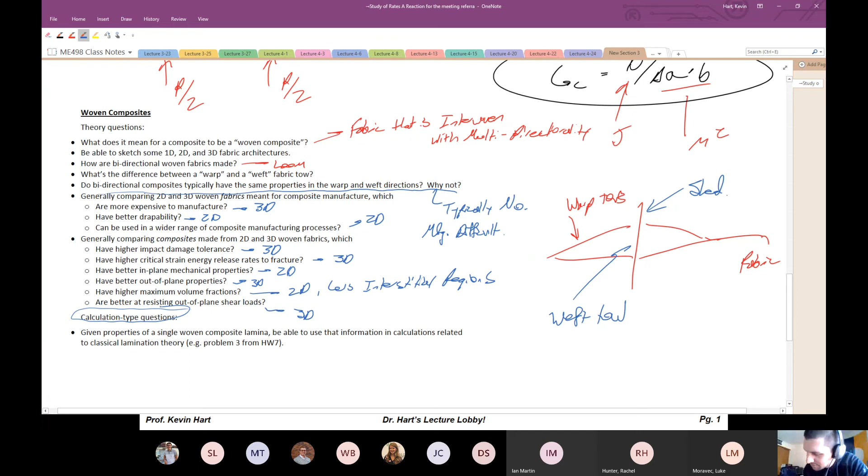All right, so calculation type questions. Well, you just did a problem that looked a lot like a calculation question you might have, like example problem 3 from homework 7. Probably not going to ask you a calculation question for woven composites because they're complicated. Last thing for sandwich composites, which is what we just got done doing the last couple lectures—I really only have qualitative type questions for you guys. I'm not going to ask you to do any calculation because calculation for sandwich composites is complicated. Why is that? Because we have to account for shear, and our classical lamination theory does not account for out-of-plane shear.

What types of loading are sandwich structures most suited to handle? Well, they're best in bending. Bending, A+. Tension, B. Shear, F. All right, so there you go.

What is the method of transformed sections? How is that applicable to a sandwich structure? The method of transformed sections allows us to replace different stiffness materials with the same material, but thinner. I wish I could do that—I want the method of transformed sections on my stomach line. Okay.

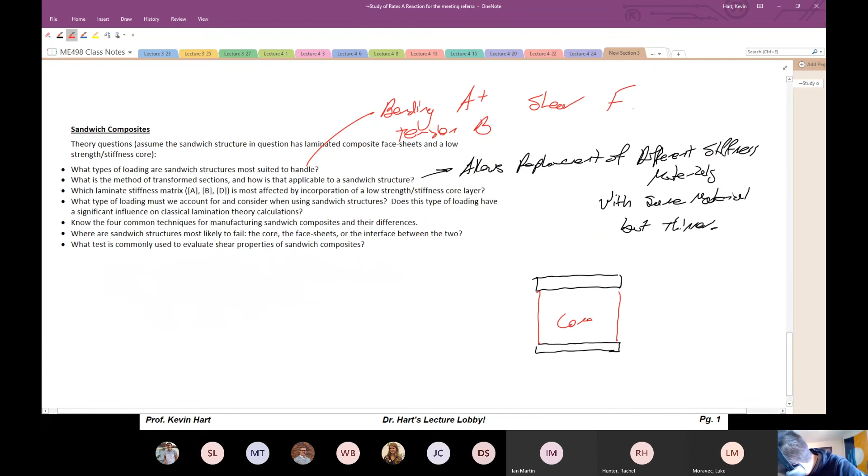So the idea here is if you have a composite sandwich structure, it's got a face sheet here and a core here. You can transform this section if your core is n times less stiff than the face sheet—you could transform it to be all one material that looks like an I-beam. Now it's all face sheet material, and we've reduced the thickness of this by a value of n, where n is the ratio of the modulus of the face sheet to the modulus of the core. These two behave identically in bending. That's the method of transformed sections—it's applicable to sandwich structures because now it looks like an I-beam, and you know as an engineer that I-beams are generally very good in bending.

Which laminate stiffness matrix is most affected by incorporation of this low stiffness core layer? The D matrix. The D matrix relates the amount of curvature you see in your piece to the bending moment that was applied—the larger the D matrix is, the less curvature you will have for the same applied bending moment. We know that from our classical lamination theory, and that actually doesn't change with sandwich structures.

What type of loading must we account for and consider with sandwich structures? Out-of-plane shear. So the picture you should have in your mind is our typical composite laminate that was thin versus your sandwich structure, which is thick. This guy can't handle loads that look like this—it can't handle these shear loads, can't do it. This guy, because it has some thickness to it, now those loads can be handled. It can handle those types of shear, and it has a big influence—it's a big deal. It completely changes our classical lamination theory.

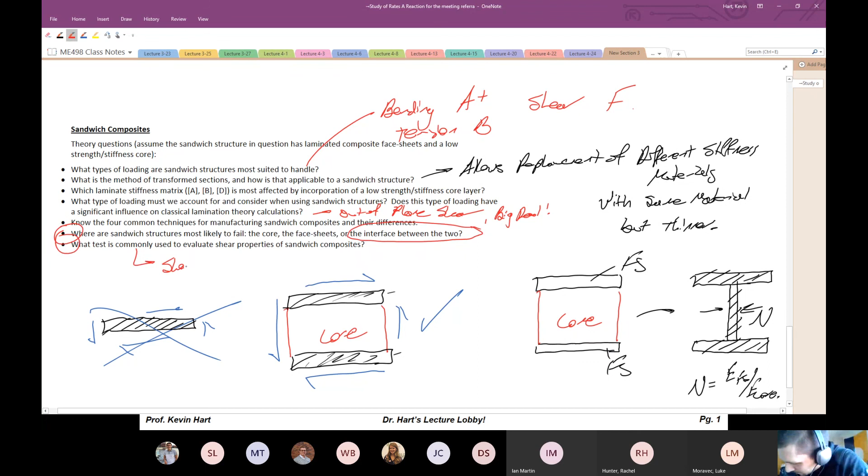Know the 4 common techniques for manufacturing sandwich composites—that's in your notes. Where are they most likely to fail? It's the interface between the core and the face sheets. And what test is commonly used to evaluate shear properties? Short beam shear test.